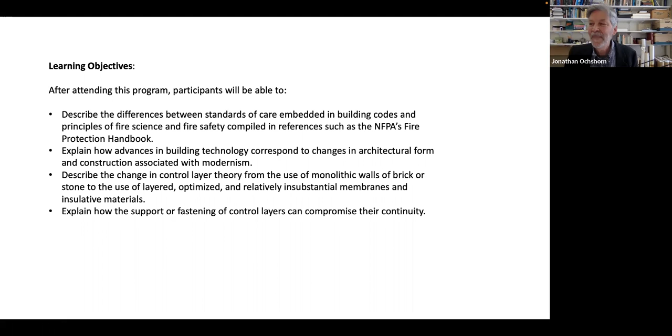But this afternoon, my presentation will discuss tendencies that work against making good buildings, based in part on a book that I recently published called Building Bad: How Architectural Utility is Constrained by Politics and Damaged by Expression.

And when I say bad buildings, I'm not talking about how they look or referring to the type of critique popularized by people like Prince Charles and Donald Trump, where particular aesthetic systems or styles have come under attack. Clearly, we all have our own subjective appraisals that we bring to the built environment.

Whether these subjective appraisals are concealed within obscure philosophical jargon, advanced by architectural critics based on their own refined connoisseurship, or regulated by federal statutes based on any number of political or economic considerations, I don't believe that indulging in such subjectivity can produce a useful theory of architecture.

So I'll try my best to avoid subjective judgments in this presentation. When I talk about building bad, I start with utility, that is, the objective functional basis for which buildings are built in the first place.

I argue that the utility of a work of architecture can be damaged not only by politics and economics, but also by the dysfunctional competition that drives fashionable expression. So let's start with the politics and economics of bad buildings, and then talk a bit about dysfunctional forms of expression, topics that correspond to the two parts of my book.

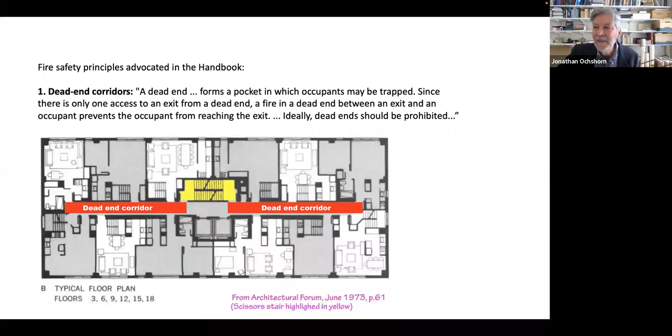Second, the building had no automatic sprinklers, which were legal back in the early 1970s.

These sprinklers would most likely have put out the fire before it became deadly. The handbook said in 1969: 'Automatic sprinklers, where a complete standard system is installed, do have a major influence on life safety.'

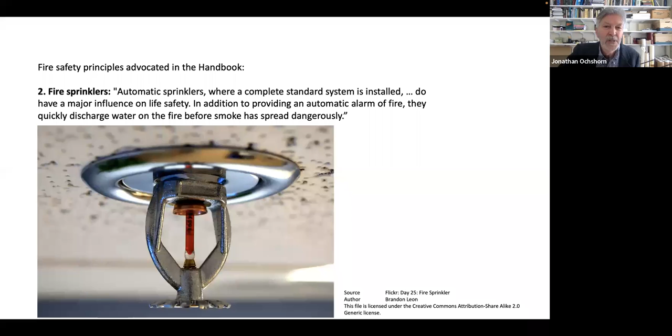In addition to providing an automatic alarm of fire, they quickly discharge water on the fire before smoke has spread dangerously. Third, the building did not place its two required fire stairs as remote from each other as possible, but grouped them together in a single shaft, even though the handbook advises that 'at least one alternate exit should be provided remote from the first.'

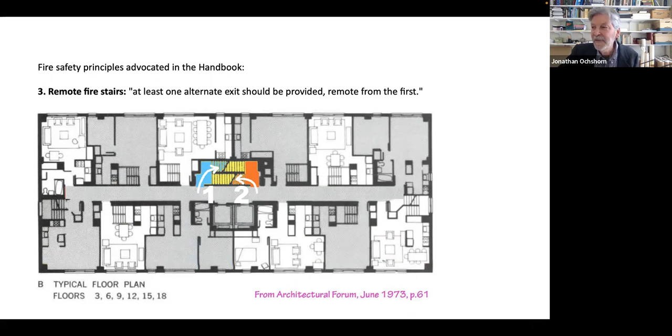Fourth, perhaps most importantly in this context, the building's fire stairs were not designed to keep smoke out. All of the 17 initial deaths in the Bronx fire were due to smoke inhalation, many occurring in the fire stairs themselves.

The handbook, reflecting the prevailing state of knowledge, states that the safest form of stair enclosure should not be placed in the middle of the building, but rather configured as a smoke-proof tower, where 'access to the stair tower is only by balconies open to the outside air, so that smoke and fire will not readily spread into the tower, even though the doors are accidentally left opened.'

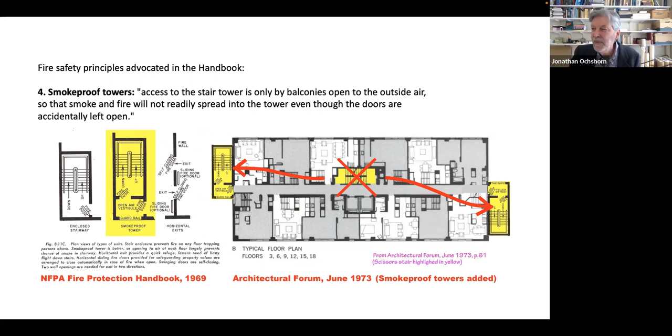This is just one example of many that could have been taken from news reports, all of which have the same underlying message: it is not a lack of knowledge, but rather the competitive drive for profitability, cutting corners to save money, that leads inexorably to these disasters.

Whether we're talking about the Bronx fire in January 2022, the Grenfell fire in London in 2017, the collapse of the Champlain Towers condo in the suburbs of Miami in 2021, or even the sinking and tilting of the upscale Millennium Tower in San Francisco, beginning in 2009 and continuing into 2022, even as it is being repaired at a cost of over $100 million.

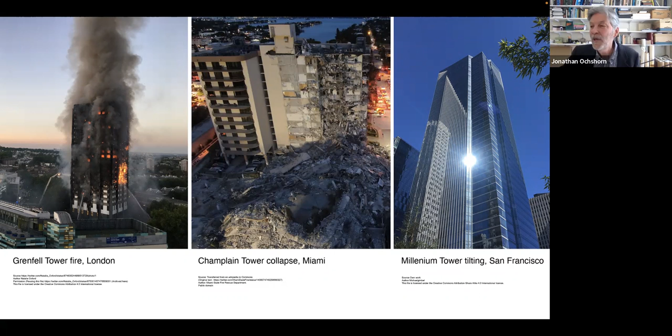In part one of my book, I look not only at the politics of fire safety and structure, but also at the politics of accessibility, security, light and air, and sustainability, with the first chapter providing an overview of health, safety, and welfare in capitalist society.

I argue that politics and economics set upper and lower bounds on architectural utility wherever health, safety, and welfare issues are at stake. What is perhaps more interesting and less self-evident is that the utility or functionality of buildings is also damaged by contemporary forms of architectural expression.

I examine this phenomenon in part 2 of the book, and this is a primary topic of my talk today. Perhaps the easiest way to frame my argument is by first presenting some examples outside of architecture where forms of expression or fashion, driven in part by the desire to reinforce social or class distinctions, can overwhelm considerations of function.

Here's an excerpt from chapter 15 of the book, on fashionable building, with an avian example. The utility of fashion for competition has two aspects. First, architectural fashion provides visual clues that indicate one's membership within a group, class, or subculture. And second, within a particular group or class or subculture, fashion acts as a means of competition.

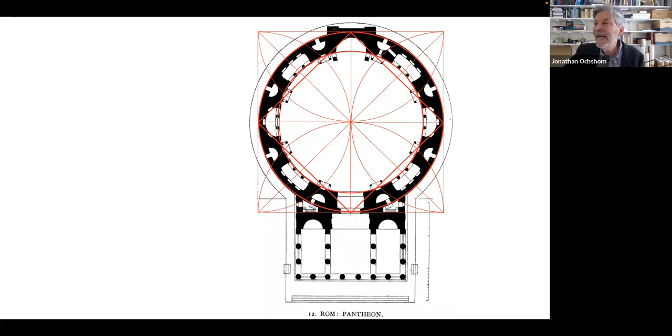That architecture has a conceptual basis does not mean that prosaic material properties and material relationships are not important. It only means that to the extent that architecture is understood conceptually, such information is placed in a different file folder. If it is accepted that abstraction is a requirement for the appreciation, understanding, and creation of architecture, the question remains as to how all the elements abstracted from those things placed in our metaphorical file folder become part of the building, as they must. For as the philosopher Hegel wrote almost 200 years ago, one cannot build an abstraction.

Up until the end of the 19th and the start of the 20th century, the type of abstraction underlying architectural design was generally built upon, paradoxically, an acceptance of conventional building elements, building materials, and building construction techniques. Windows remained windows, doors remained doors, walls remained walls, roofs remained roofs. In general, structural forces were resolved in conventional ways. Construction proceeded along conventional lines, and environmental constraints on site planning, building orientation, and so forth were respected.

The conceptual basis of such architecture neither challenged nor threatened these prosaic elements and conventions, but was rather developed with these elements in mind. Window openings may have been elaborated or framed with ionic columns and decorated with various ornamental forms, and the geometric organization of the facade may have abstracted from material or constructional logic of brick, stone, or plaster surfaces from which its expression emerged. But the window was still understood as a window, and the wall was still understood as a wall.

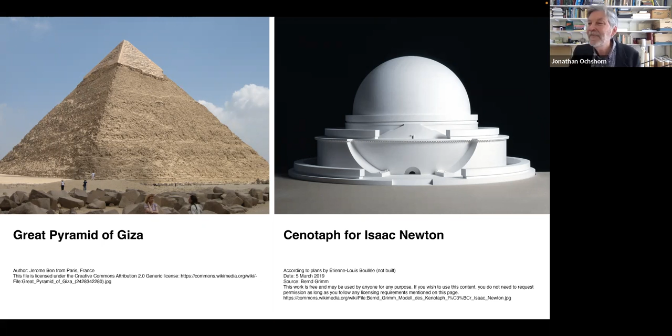Architectural abstraction as mere elaboration or ordering of conventional building elements began to be challenged in the late 19th century, and especially in the early 20th century.

While the canonical houses of 20th century modernism were hardly representative of domestic building then or now, they were extraordinarily influential in creating a kind of beachhead from which radical attitudes towards abstraction could take root and ultimately become major factors in both the pedagogy and practice of architecture.

This new form of abstraction differed markedly from traditional forms of abstraction. Le Corbusier's five points of architecture describe the potential of new technologies, in particular the replacement of load-bearing walls by structural frameworks, to overcome what were considered insufferable constraints of traditional construction. In many of his buildings, windows are abstracted as rectangular openings or voids. Other conventional building elements are defamiliarized or eliminated entirely.

Stucco replaces clapboards as it betrays no material origin and can be more easily understood as abstract surface. Roof shingles, along with sloped roofs of any sort, are simply eliminated as they contain such strong references to the traditional tectonic geometry of attics and gables. Brick chimneys are replaced with painted metal cylindrical pipes, and all traditional ornamental or decorative embellishments are banished.

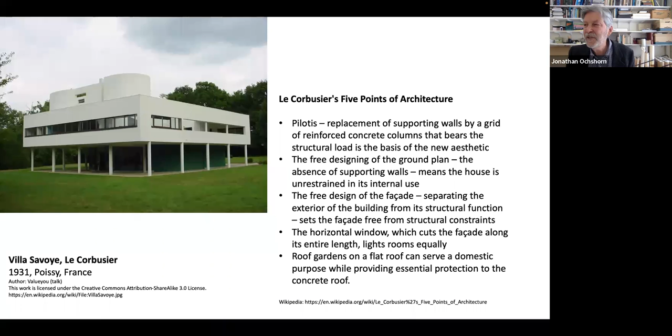The point here is not to criticize any particular aesthetic outcome or to propose a return to any particular stylistic tendency. The key change from the standpoint of building failure and building function is that for the first time, architectural abstraction was made independent of building construction and building conventions. Many advances in building technology can be cited to explain the motivation as well as the potential for changes in architectural form and construction associated with modernism.

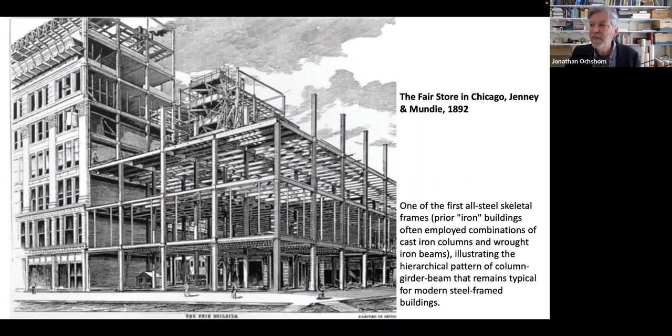Perhaps the most obvious were major improvements in the production of ferrous metals used to create structural frameworks, leading to the widespread use of standard I-beams and later wide flange sections made from rolled steel. At about the same time, near the turn of the 19th into the 20th century, reinforced concrete also became, for the first time, a viable structural material. It is hardly accidental that the formal inventions of modern architecture drew upon the structural potential of these new materials.

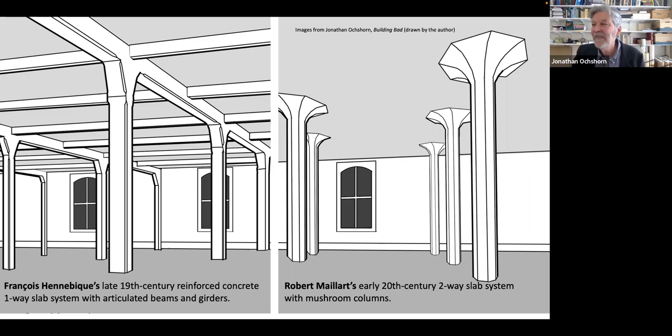If structure were abstract grid or abstract plane in the case of load-bearing walls, and if glass were abstract void, other constructional elements or materials required to complete the desired abstract compositions of modern design were harder to find. The neutral solid surface had to consist of something, but nothing new is available except perhaps the mottled gray surface of reinforced concrete. More often, such surfaces were created, as they had been for thousands of years, by applying a layer of stucco to an underlying substrate of brick or later concrete block, even in Corbusier's Villa Savoye.

The important point is this: in spite of an abstract conception of buildings which eschewed conventional building elements and conventional material expression, modern buildings still needed to be actually and physically constructed. Moreover, modern architects had hardly given up or gone beyond a traditional understanding of building construction as consisting fundamentally of physical things whose value was measured, as it had always been measured, by their strength, by their resistance to movement, and by their durability.

Expressing such characteristics of building materials as heroic elements that were both visible and tangible may not always have been a formal preoccupation of modern architects, but the heroic quality of constructional elements remained for modern architects an unchallenged model for putting together, for building their abstract concepts. The belief that traditional or heroic materials constituted the basis of building construction, if not always the conceptual basis of the architecture, became increasingly untenable in the 20th century because the underlying basis of architectural technology underwent a radical transformation.

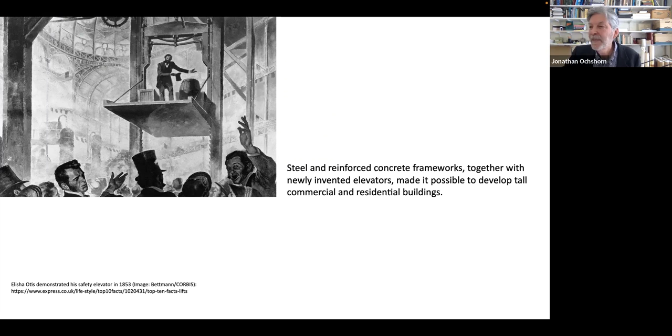The reasons for and the results of this transformation can be summarized as follows. Steel and reinforced concrete frameworks, together with newly invented elevators, made it possible to develop tall commercial and residential buildings. The obsolescence of load-bearing masonry walls in this context created both the possibility and the incentive for reducing the thickness and weight of cladding systems.

Air conditioning as part of mechanical ventilation systems, and therefore the ability to eliminate natural ventilation, made it possible to think of the building envelope as a skin rather than as wall and window, while the elimination of the requirement for natural ventilation also permitted deep floor plates and formal geometries that were no longer constrained by the need to create rooms with windows.

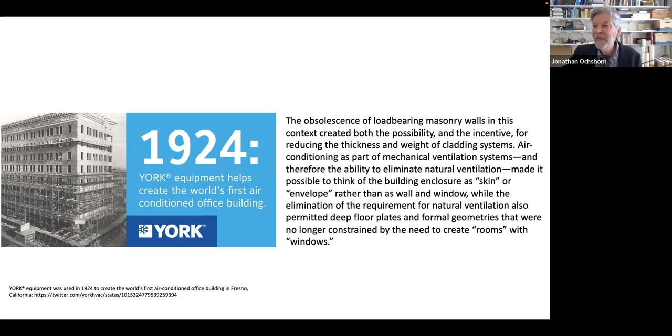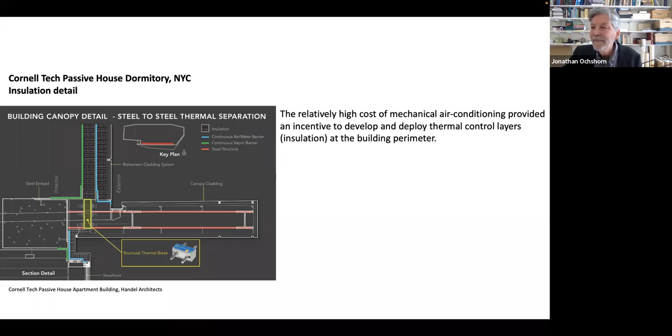The relatively high cost of mechanical air conditioning provided an incentive to develop and deploy thermal control layers, insulation, at the building perimeter. And problems with failed sealant joints, condensation, polluted outside air, increasing energy costs, and water intrusion led to the conceptualization and deployment of rigorous control layers for vapor, rainwater, and air, in addition to the thermal control layer mentioned earlier.

It is important to emphasize that what had previously controlled rainwater, vapor, air, and heat loss—the thick and more or less monolithic masonry walls of traditional construction—were the same elements that largely defined the architectural expression of traditional buildings. Architecture grew out of and supported this underlying technology, just as the technology supported the architectural expression. However, while the technology of control layers has migrated from the heroic materials of traditional architecture to

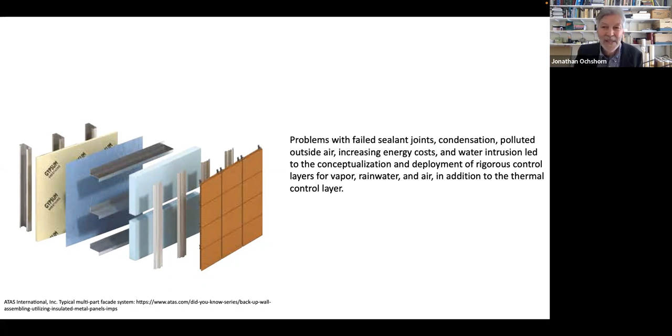the separate, optimized, and non-heroic membranes and insulative materials characteristic of contemporary construction, formal architectural design in the 20th and early 21st centuries largely remained stuck in the paradigm of traditional and heroic material expression—not only ignoring this profound technological shift, but actually moving in directions that exacerbate problems of vapor, air, and rainwater intrusion, as well as energy efficiency. In the new paradigm for architectural technology, four control layers need to occur consistently at the boundary between inside and outside space in order to control these four environmental factors: rainwater, vapor, air, heat.

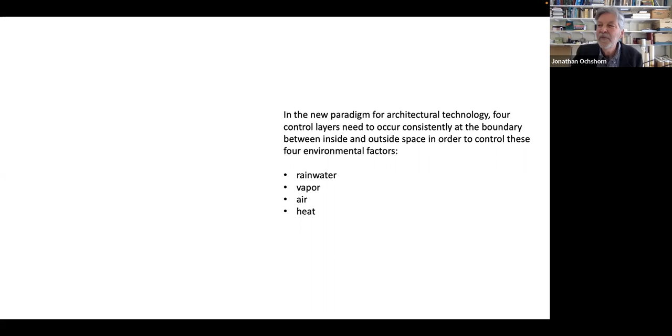Wherever a control layer's integrity is violated along that boundary, the potential for problems increases. Thermal bridges—that is, discontinuities in the thermal control layer—not only may lead to unintended heat loss or heat gain, but may also alter the temperature gradient between the outside and inside surfaces of the enclosure system, leading potentially to condensation, whether on interior surfaces, exterior surfaces, or interstitially. Such condensation may lead to structural damage, non-structural damage, and to the growth of mold.

As an example, pictured here, the Aqua Tower was characterized by Joseph Lstiburek in the ASHRAE Journal as, quote, a thermodynamic obscenity that takes your breath away, an 82-story heat exchanger in the heart of Chicago, end quote.

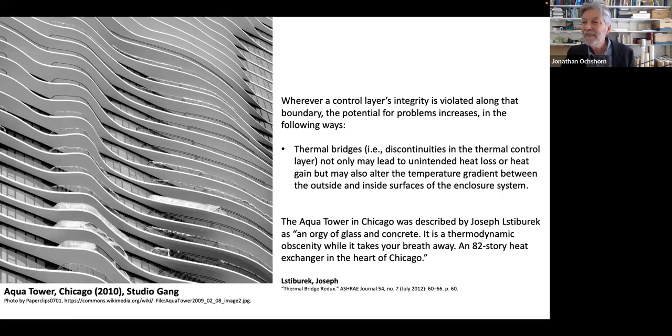Holes or gaps in the rainwater control layer obviously increase the potential for water to enter the building in unintended ways. This is my architecture building at Cornell, with the bucket catching rainwater from the roof. Water is probably the single most damaging element in buildings when not properly controlled. In its presence, wood may rot or decay, ferrous metals may rust, dissimilar metals in contact with each other may undergo galvanic corrosion, gypsum board may be damaged, mold or mildew may grow, and so on.

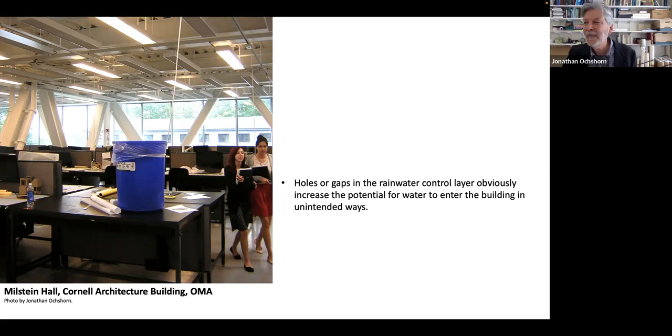Holes or gaps in the air control layer can increase the probability that air will move through the enclosure wall or within the enclosure wall in unintended ways. All sorts of negative consequences may result. In particular, energy may be lost in much greater quantities than from discontinuities in the thermal control layer, since pressure differentials between outside and inside areas can drive large amounts of unconditioned air into the building while driving large amounts of conditioned air out of the building.

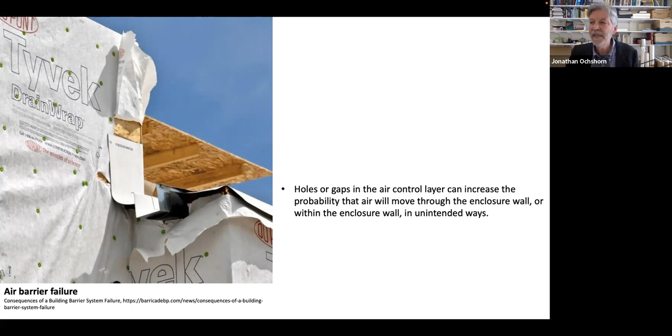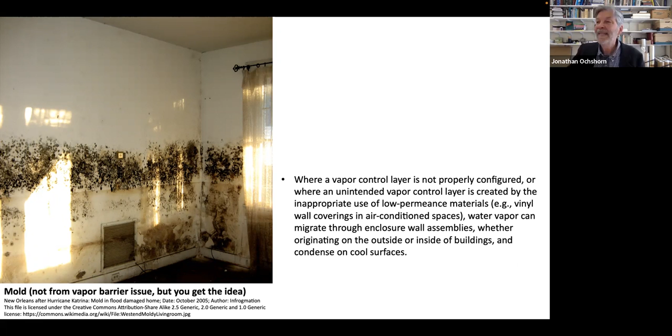Such unintended patterns of air intrusion can also wreak havoc on HVAC systems and create unexpected condensation within enclosure walls as conditioned or unconditioned humid air finds its way onto cold surfaces outside or inside the thermal control layer. Where a vapor control layer is not properly configured, or where an unintended vapor control layer is created by the inappropriate use of low permeance materials—for example, using vinyl wall covering in air-conditioned spaces—water vapor can migrate through enclosure wall assemblies, whether originating on the outside or inside of buildings, and condense on cool surfaces.

Assuming that the various control layers are properly configured with respect to each other, so that, for example, an air barrier is not positioned within the enclosure wall assembly in such a way that it prevents water or vapor from draining or drying out—in those cases, the primary task is to make these control layers continuous.

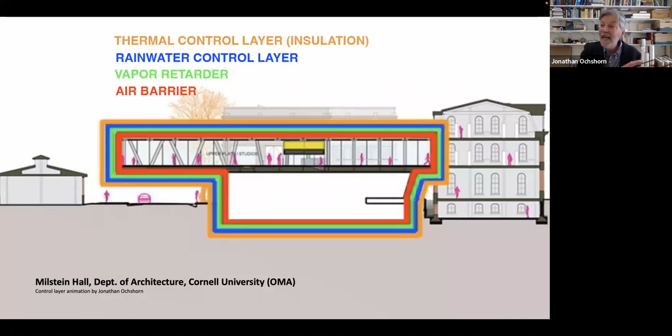This is not particularly easy to do because control layers are most efficiently deployed outside the building structural frame, so that they are not constantly interrupted by interior partitions and floor-ceiling assemblies, and so that the building structure is protected from thermal changes and other environmental damage.

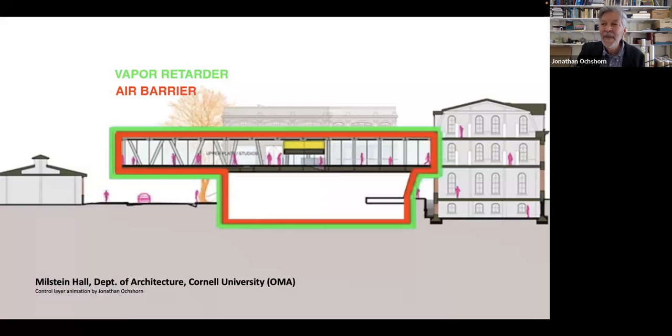Because they're deployed outside the building structural frame, they must be supported by or connected to the building structure in some way. Unless they are adhered or glued to the building structure or to some sort of backup surface or substrate supported by the building structure, then their means of support—whether clip angles, bolts, screws, nails, etc.—invariably penetrate not only the control layer being supported, but also any control layers positioned between the control layer being supported and the structural substrate.

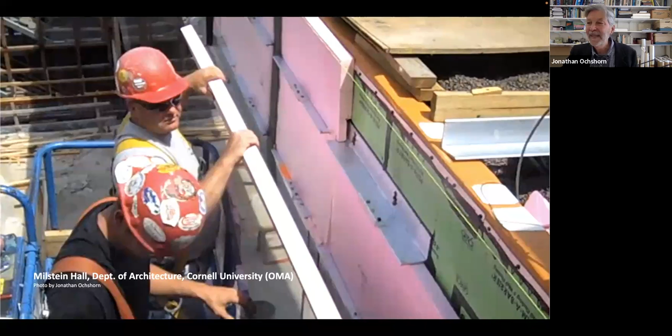Another image from the architecture building at Cornell showing its construction, pointing out that even if all the control layers are light enough to be adhered without penetrating fasteners, the outer rain screen cladding material is needed not only to establish architectural presence but also to protect delicate control layers from damage, and sometimes to create an air cavity or pressure equalization chamber. This cladding still requires a fastening system that invariably must penetrate the control layers it covers and protects. Roof systems require the same control layers but have different problems, particularly penetrations for mechanical equipment or skylights, and transitions between vertical, sloping, or horizontal surfaces.

In the image, you can see stone panels, the cladding, supported by large clip angles which penetrate the thermal control layer, creating thermal bridges right through the insulation, rather than being deployed outside the insulation layer and fastened back to the structure using smaller steel, stainless steel, or carbon fiber pieces. This illustrates a fundamental contradiction in the theory of control layers, but one that can largely be overcome by minimizing these inevitable penetrations and by detailing them explicitly where they occur, for example at windows or other openings and at the fasteners themselves, in order to maintain the continuity of the control layers that would otherwise be interrupted.

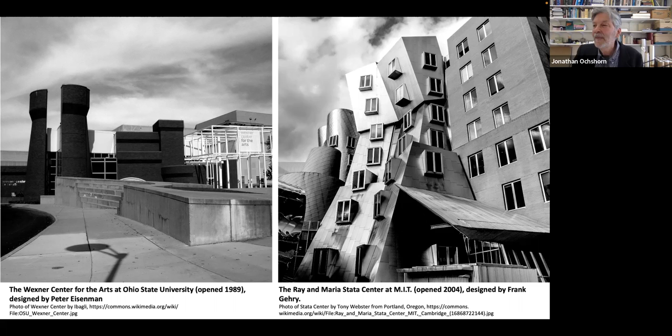The logic of control layer design in modern construction cannot simply be ignored. Describing the Wexner Center for the Arts at Ohio State University, designed by Peter Eisenman in 1989, Robin Pogrebin wrote: 'It would seem embarrassing for any architect, let alone one as prominent as Peter Eisenman. You design a museum, your first large-scale work, a breakout project whose exterior scaffolding design, a virtual celebration of impermanence, sets the architecture world a-buzzing. Within just a few years, however, cracks start to show. Quite literally, the skylight leaks, the glass curtain wall lets in too much light, threatening to damage delicate artwork. The interior temperature swings by as much as 40 degrees some days.'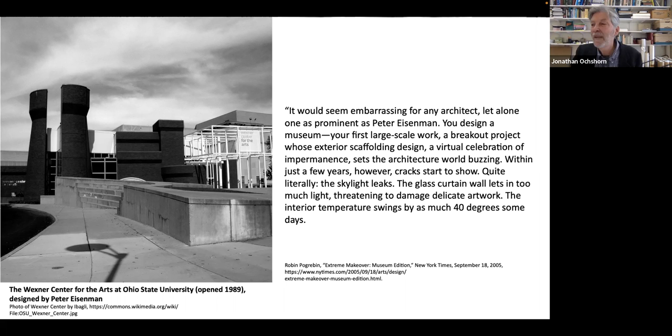Different control layer problems plague the Stata Center at MIT, designed by Frank Gehry in 2004. 'MIT has settled its 2007 lawsuit against the architects and builders of the Ray and Maria Stata Center. MIT's lawsuit cited design and construction failures in the building. These included masonry cracking and poor drainage in the amphitheater, mold growth at various locations on the brick exterior vertical elevations, persistent leaks throughout the building, and sliding ice and snow.'

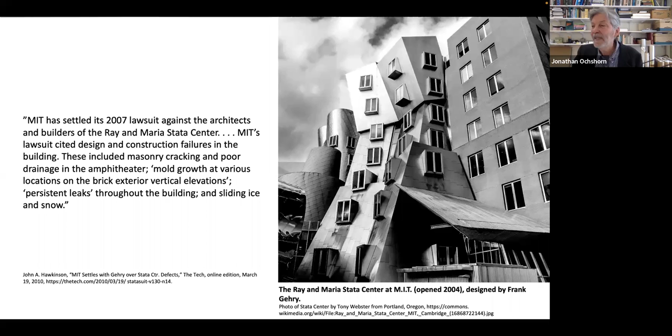The problem is that in a world of architectural production driven by competition, any logical constraint on a designer's freedom of expression leads the designer, perversely but inevitably, to explore precisely those forbidden places outlawed by prevailing conventions. In defying such logic, the designer seeks to defamiliarize what has become so commonplace that it is no longer capable of eliciting an aesthetic response, and therefore of serving as a useful mode of competition. This is the heroic conceit of the contemporary avant-garde: to confront so-called danger in whichever of its manifestations appears as an appropriate target at any given point in time.

Joseph Campbell, the American theorist who wrote about shared world mythologies, in particular the journey of the archetypal hero, abstracts from the culture of competition that motivates artists to embark on such counterproductive heroes' journeys, seeing only the mythical and idealized shell of heroism in such attempts. He says: 'Artists are magical helpers. Evoking symbols and motifs that connect us to our deeper selves, they can help us along the heroic journey of our own lives. Over and over again, you are called to the realm of adventure. You are called to new horizons. Each time there is the same problem: do I dare? And then if you do dare, the dangers are there, and the help also, and the fulfillment or the fiasco.'

"There's always the possibility of a fiasco, but there's also the possibility of bliss." Ironically, an inattention to building science is precisely what this version of heroism entails. Architects are not so much "helping us along the heroic journey of our own lives" but rather creating out of thin air a heroic journey for themselves, leaving the world of safe, predictable constructions, proposing buildings with both the appearance and reality of danger—danger from challenging notions of aesthetic and literal comfort, challenging class-based conventions regarding the economy of means, and especially challenging forces of nature such as gravity, rain, or snow—then returning in glory after confronting the agents of conformity, whether owners, users, or public officials. For such heroes, having proposed or built such a brave thing with all the attendant risks of failure is a badge of honor. Peter Eisenman, in his interview with Robin Pogrebin, boasts that "there's not an architect I know that doesn't have problems with important buildings."

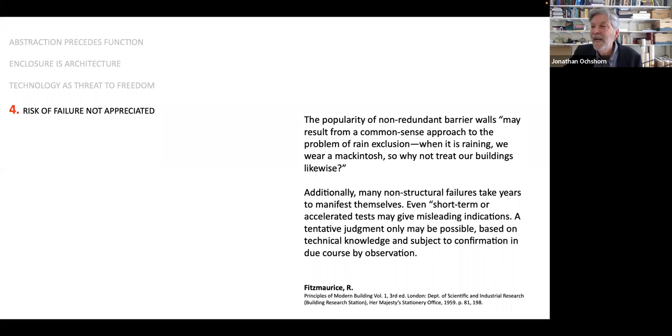Additionally, many non-structural failures take years to manifest themselves. Even short-term or accelerated tests may give misleading indications. A tentative judgment only may be possible, based on technical knowledge and subject to confirmation in due course by observation. Cracking and bowing of marble cladding panels on the Standard Oil Company headquarters in Chicago—the name was subsequently changed to the Amoco Building, and it's now the Aon Center—were first noticed almost 7 years after initial construction, and became increasingly prevalent only within 13 years of construction.

And they finally led to the complete replacement of the facade after 19 years. Such non-structural failures are often costly, inconvenient, and dangerous, but they are rarely catastrophic.

Number 5: because the traditional means of dealing with enclosure is primarily based on empirical rather than scientific knowledge, most modern architects do not necessarily know what they don't know about the subject, and are thus more inclined to either extrapolate inappropriately from prior experience or simply invent constructional details based on a superficial understanding—that is, a misunderstanding of the complex forces at work.

In other words, the empirical basis for much prior constructional success, having little grounding in a theory of building science, is discarded without the modern architect knowing exactly or even approximately what is being lost. For example, if a 24-inch thick load-bearing masonry wall seems to work well at keeping water out, it may not be clear why 8-inch thick cladding supported on a structural frame wouldn't keep water out just as well.

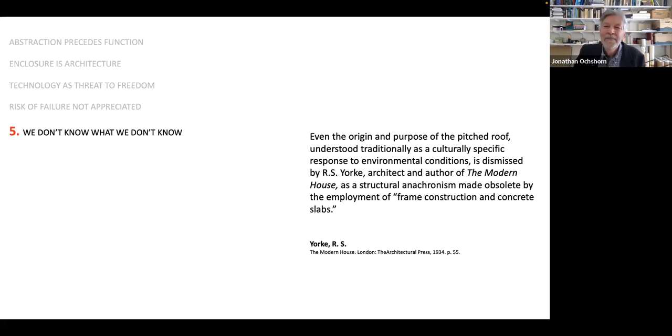Number 6: There is also a tendency to overestimate the durability of many modern systems and materials, as modern becomes identified in popular culture with overcoming traditional labor-intensive practices. Habits of maintenance characteristic of traditional building practice—continual repair, replacement, pointing, painting, etc.—all these things are loosened from their traditional bearings.

While expectations of permanence, toughness, and resiliency become part of the culture, if not the reality, of modern materials, two other factors make decisions regarding durability more difficult for the architect. First, it is not easy to obtain definitive information on the performance characteristics of complex components, equipment, and systems.

Knowledge is limited because those who have it tend to view it in a proprietary manner and are often reluctant to share it. Competing manufacturers vying for market share may not always be inclined to objectively compare their products with others. And second, the desire to extract the maximum profit from investments in commercial buildings tends to encourage both marginal construction practices and deferred maintenance.

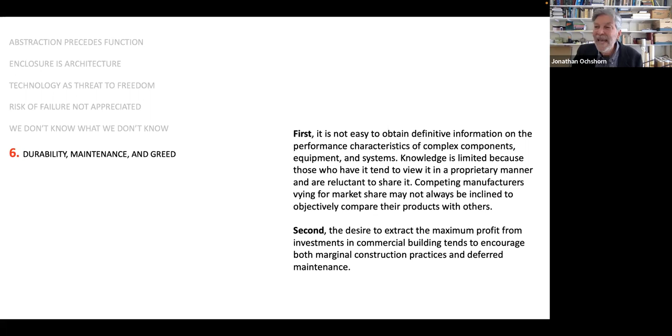Number 7: A disdain for conventional applications of technology may seem somewhat paradoxical in light of modernism's invocation of precisely this technology in its manifestos opposing traditional modes of building. But several factors are at play.

There is first a distrust of and backlash against technical solutions within so-called postmodern culture, and this phenomenon lends support to architectural forms that express these feelings by literally distorting that which appears as logical within modernist practice. Second, with the victory of modernism over traditional construction practices, what was heroic and radical in the deployment of steel and reinforced concrete frames becomes conventional.

Given the cyclic movement of fashion, it is inevitable that an avant-garde style, once integrated and accepted within popular culture, must give way to something new. The negation of the logic embedded within modernist conventions becomes the stylistic path of least resistance.

And third, technology is still expressed, even fetishized, in its irrational manifestations. Glass is reimagined, no longer merely as the void in modernist abstraction, but as the visible and universal boundary between inside and outside. Cladding is similarly abstracted as universal surface. Structure is bent, angled, cantilevered, hyper-articulated, and so on, using techniques based on distortion or other forms of defamiliarization.

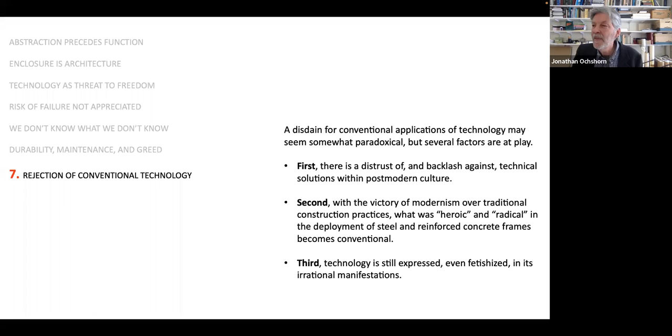Number 8. Modern attitudes to construction tend to focus on structure and cladding as so-called 'heroic materials' through which the ideas of the designer are made visible.

In the postmodern reaction to modernism, such attitudes survive largely intact. Critiques of modernist idealism still rely on structure and cladding as expressive formal elements.

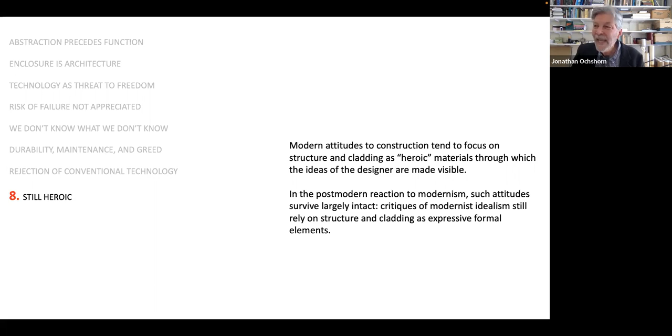Yet as building science evolves, the failure to acknowledge an emerging paradigm shift in the actual requirements of building—that is, from the use of relatively unsophisticated enclosure strategies characteristic of modernism, to the more subtle application of non-heroic systems based on control layers to control air, vapor, water, and heat flow, and incorporating issues of sustainability—this is increasingly problematic. And number 9: magic pill.

At the same time, even as the expression of technology, as a manifestation of rationality, is subjected to formal critique, technology itself is not actually rejected, but in fact assumes an almost mystical aura.

If the engineer of modernism, as Le Corbusier wrote in 1923, quote, inspired by the law of economy and governed by mathematical calculation, puts us in accord with universal law and achieves harmony, end quote, the postmodern engineer rejects the constraints of economy, values ambiguity over harmony, and relies on complex numerical methods programmed within the black box of sophisticated analytical software to transcend the limitations of traditional mathematical calculation.

Cecil Balmond, one of the more notable contemporary engineers, writes, quote, structure need not be comprehensible and explicit. There is no creed or absolute. It can be subtle and more revealing. It is the richer experience if a puzzle is set or a layer of ambiguity lies over the reading of structure, end quote.

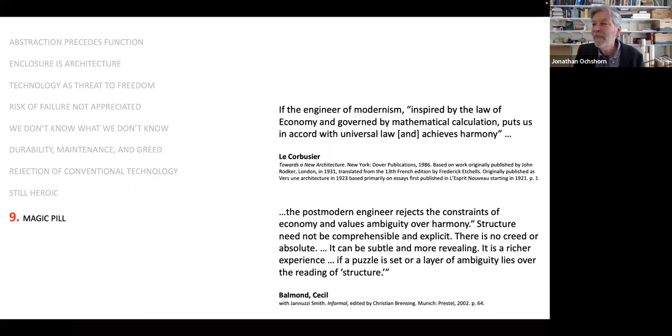Technology in this context is thought to possess almost limitless power to overcome problems originating in any predetermined form, no matter how arbitrary and illogical. Form, in other words, can be abstracted from virtually all considerations of a technical nature. And technology, much like the digital improvements common in photography, music, and film, can compensate for what might have been a hopelessly misconceived or inadequate performance.

The singer-songwriter producer Ben Folds captures this sentiment perfectly in his 2001 song, I'm Rocking the Suburbs: I take the checks and face the facts that some producer with computers fixes all my shitty tracks.

The problem with this attitude, at least in architecture, is twofold. First, such technical quote unquote solutions focusing only on internal criteria of success may lose sight of other criteria external to the immediate problem. For example, a solution to the problem of environmental control may end up requiring excessive energy use. And second, such an attitude is just unrealistic.

Unlike structural frameworks or other relatively straightforward technical systems within buildings, the reliability of the building envelope is threatened by thousands of highly complex and often unpredictable interactions among building materials and systems, subject to differential movement, chemical reactions, environmental agents, construction and maintenance operations, and so on. Architectural form based upon empirically validated principles of building science, form that minimizes the collisions amongst these countless variables, has a greater probability of success than does architectural form that either willfully distorts these principles or operates as if such principles can be applied after the fact.